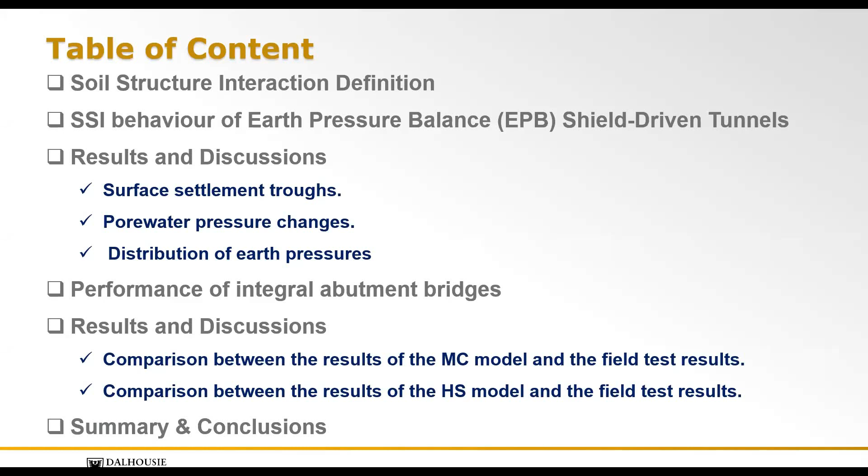Okay, so we're going to finish with a summary and conclusions.

So, soil structure interaction. What is soil structure interaction? It is a process in which the deformations of the structure will affect the response of the soil, and in turn, the response of the soil will affect the deformation of the structure. So it is important. Let's see what we have.

First, some structural engineers may consider analyzing their structure assuming that we have supports here, basically closing everything, assuming the building is built on rock with no deformation, no soil structure interaction. This will entail no interaction at all. If we have seismicity, an earthquake or whatever, we're going to have a big problem. The performance will be so different.

Then, one step ahead, one step further, will be to represent the soil using springs, to simulate the stiffness of the soil and its effect. So again, we didn't simulate the real soil structure interaction, we just took part of it. We can say it's not halfway, let's say 10% or 20% along the way.

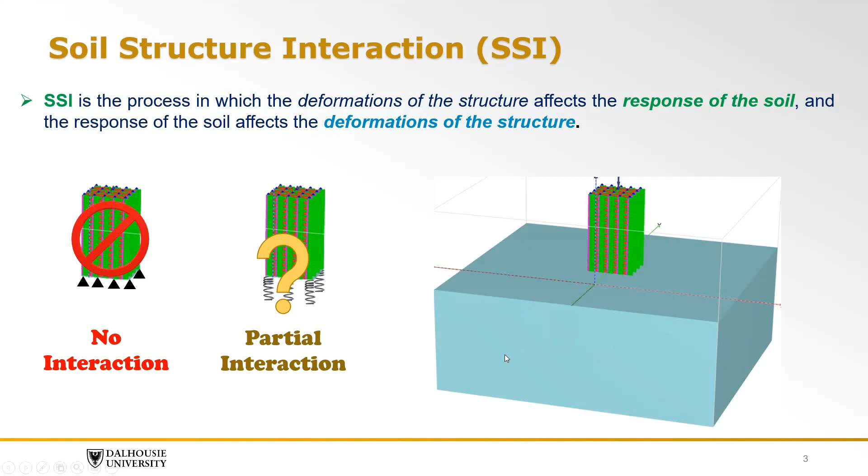Then if we consider the entire thing, the full soil structure interaction, this is the right thing to do. This is actually going to give you the real performance, or the real prediction of the performance of your structure. So here you're going to consider the full interaction.

So this is our journey through soil structure interaction. We can totally ignore it - wrong results, bad prediction, not good. Or we can consider it partially, but again, partially means some part of it, so it's not good, but let's say 10, 15, 20% along the way. And of course, if we want to consider everything, we need to consider the full soil structure interaction.

However, every one of these approaches comes with its cost. So the numerical cost, the numerical effort, and the expertise of the numerical modeler is very important here when we consider the full soil structure interaction.

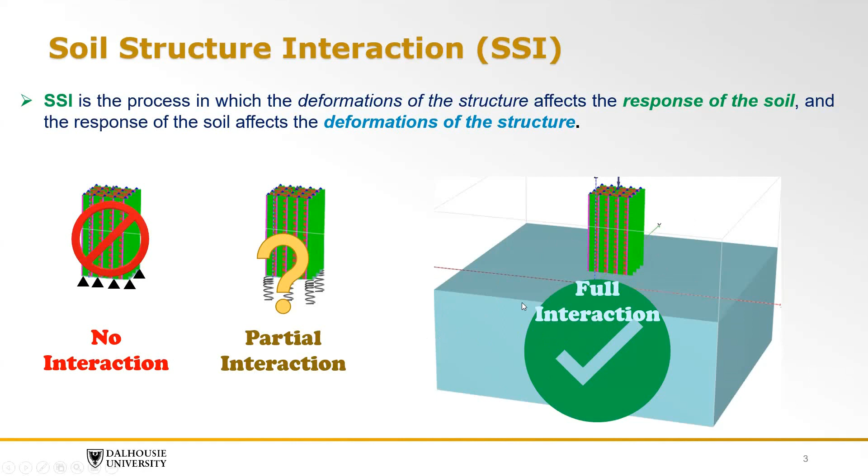So let's continue. In this lecture today, we will explore the effect of soil structure interaction and the predicted performance of two special geotechnical problems. I chose two different problems for this lecture to show you the power of soil structure interaction.

The first problem involves investigating the effect of soil structure interaction and the employed constitutive material model on the prediction of the behavior of earth pressure balance shield-driven tunnels, utilizing a real case study of Metro Line 2 in Shanghai, China.

In the second problem, we're going to do basically the same thing - investigate the performance of integral abutment bridges. However, we're going to use a case study from New Brunswick, Canada.

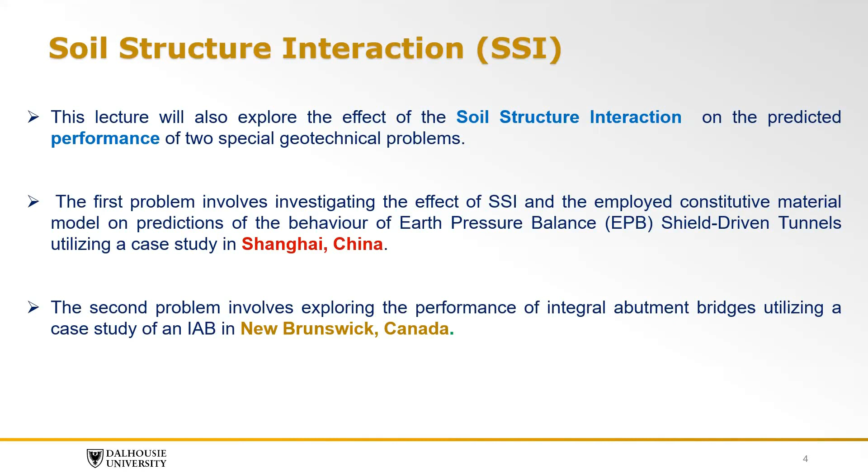So let's start with the tunneling problem first. This is the map of Shanghai. This is Line 1, and the green one here is Line 2, which we considered in our analysis.

So after they excavated or drove Line 1, they went into Line 2. If we expand this area to magnify it, we're going to see this is Line 2 here, and these are the boreholes available along it.

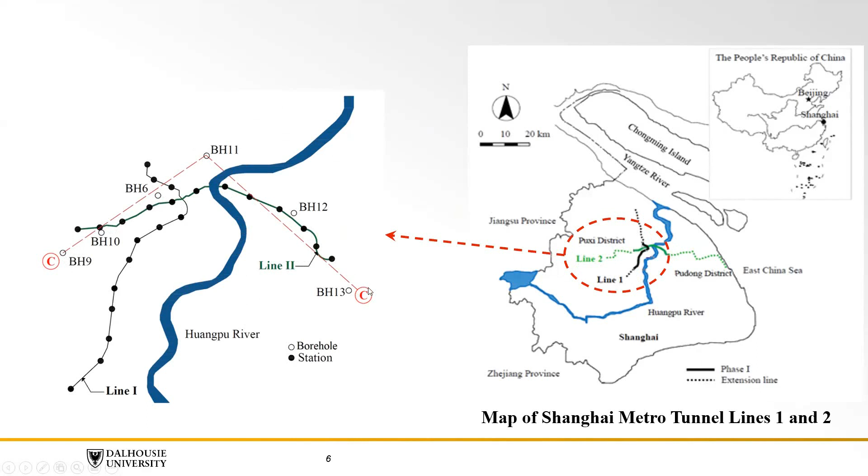As we see, we have so many soil layers here - mostly soft clays, soft soils, silty clays. So in general, soft soils.

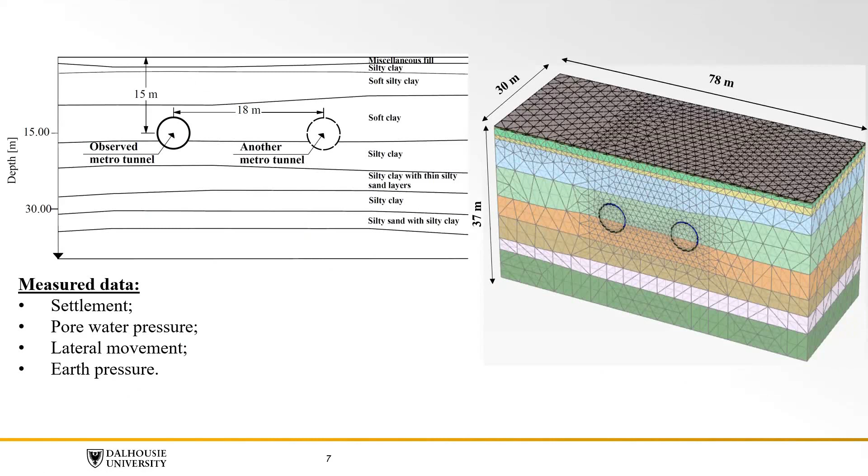And the tunnel itself was composed of two tunnels - tunnel 1 and tunnel 2. What we have in hand is the settlement readings, or monitoring program results for settlement, pore water pressures, lateral movement, and earth pressures. That's what we have, as we're going to see later on.

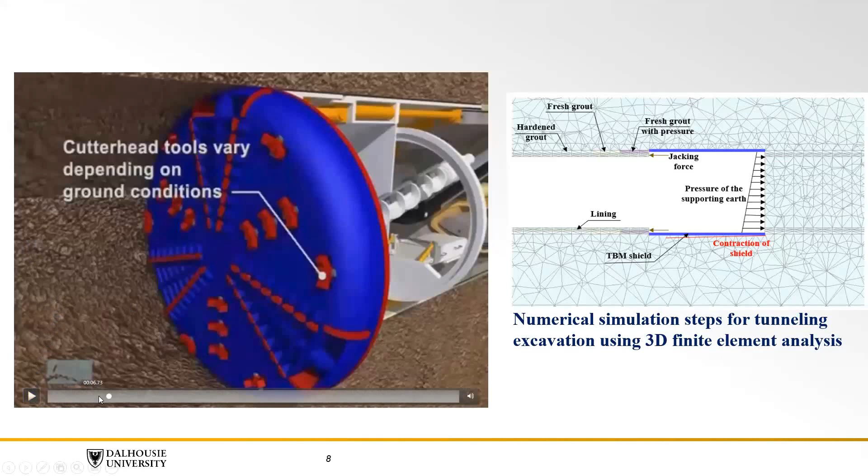So let's refresh our minds on what earth pressure balance tunneling involves. If we look into here, this is the tunneling machine - it has a kind of conical shape a little bit, and we have the face pressure here.

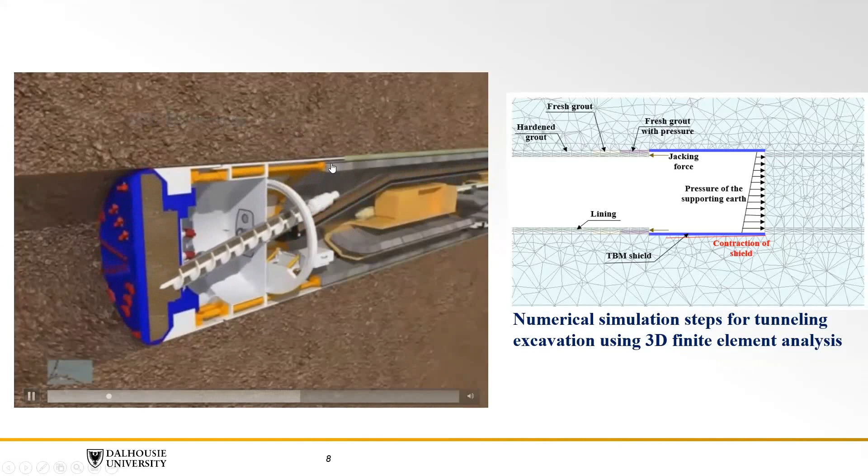As it excavates, the residual products of excavation are conveyed out through the conveyor. As it excavates, creates the area, and moves in, we're going to create a void space to install the new segmental lining. Then after we put each segment along the ring, we start injecting grout.

So if we look from this side, we have face pressure, then our lining, and we have grout in the tail here. This grout is not hardened immediately - we have fresh grout, and this fresh grout will harden over time as we proceed. So this is the general process.

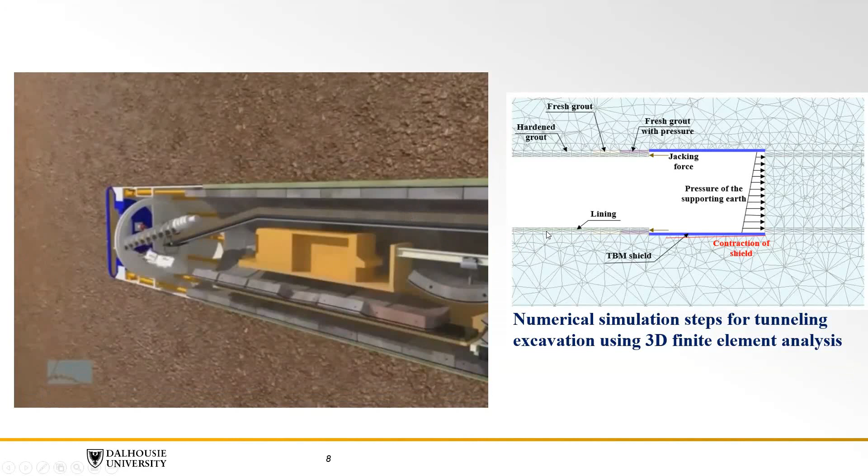So in order to start the model, we use the concrete model available in Plaxis.

This concrete model was just new. This work here that I'm presenting, we did it, I think, 3 years ago. So we have first to validate the model, make sure that the model works fine.

We validated the results through tests done by Wee et al. for plain concrete in 1996, and another test by Mansour et al. in 1999. Here we have stress versus strain, and the gold dots represent the test results, whereas the continuous green line represents the predictions of Plaxis 3D. It is beautiful, we can say that it matches beautifully.

We were able to capture the performance of the concrete, even post-cracking, which is very important in this region here. So it is amazing. I actually had to double check it a couple of times to make sure that everything is fine.

This was done by my student, who right now is Dr. Anna Maria Zaki. This paper is published in Transportation Geotechnics. I can give you the link at the end for the paper to enjoy reading it.

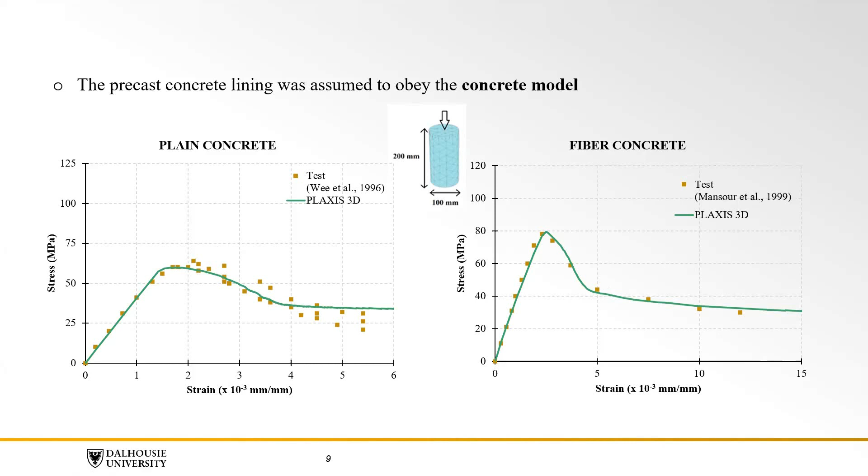Also, what we are showing here is the 3D mesh of the problem. We have several different layers, as we said before, and we modeled 42 meters of this tunnel in the third direction.

We use the hardening soil model. We wanted to see which soil model would give us the best prediction. So we considered the hardening soil model, the hardening soil model with small strain stiffness, the modified cam clay model, and the soft soil model, all in Plaxis.

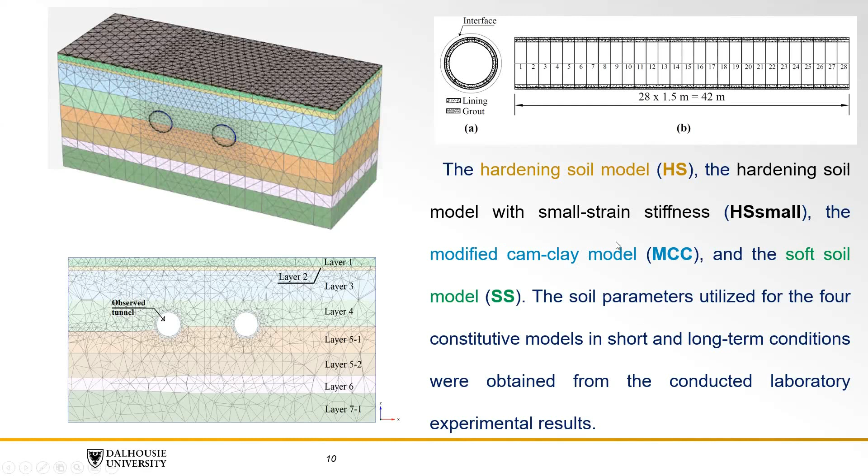The soil parameters utilized for the 4 constitutive models in short and long-term conditions were obtained from the conducted laboratory experimental results. Accordingly, we obtained all of the required parameters for each of the models. Here I'm just summarizing what this entails in 3D.

As we said, we have face pressure here that will be applied, and we have the weight of the conical shape earth pressure machine. This is the shield of the machine. As it progresses stepwise, as it installs the new liner ring, the grouting will continue - we start with fresh grout, and then as it proceeds, this grout will be hardened, so it will be assigned the hardened grout properties. Then the process will just repeat until we finish it.

Just for your information, each run took us, on a very powerful server that we have in our group, 7 days continuous. Why? Because we are modeling everything - we are modeling the true construction procedure.

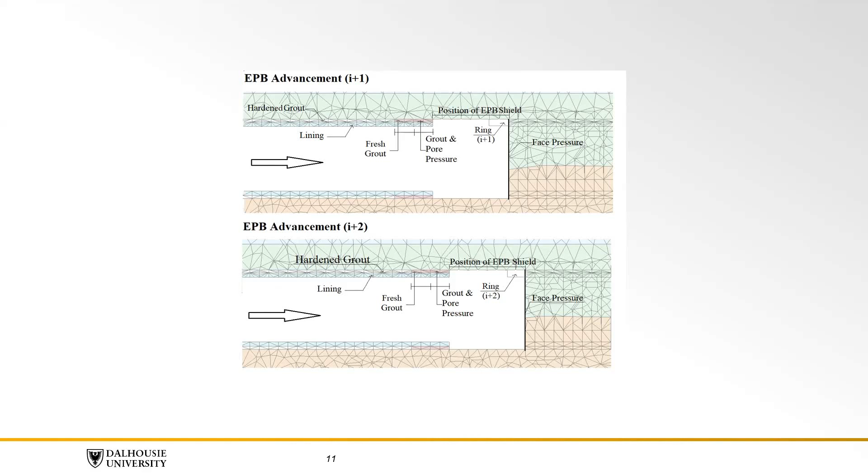We also modeled the connections, so we modeled the tunnel segments and the connections with the bolts. So everything is being modeled here in detail.

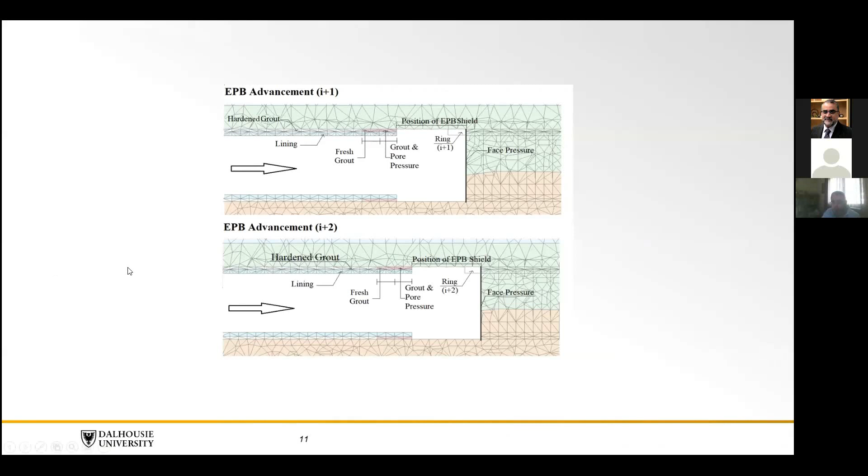Let's see what are the monitoring results and their comparison to the predictions of our model. We have the results of the surface trough after 1 month and after 3 months from the general heading time. The experimental results are shown here as orange squares - this is after 1 month and this is after 3 months.

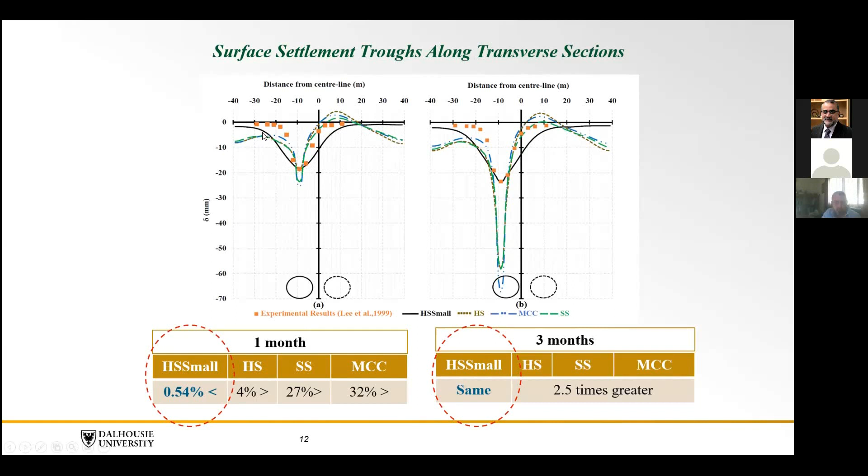The black continuous line represents the hardening soil model with small strain. The brown one represents the predictions of the hardening soil model, whereas the blue one represents the modified cam clay, and the green represents the soft soil model.

As we can see here, the best one of them that mimicked the performance of the settlement trough is the hardening soil model with small strain. After 1 month, the predictions were within less than 0.5%, and 3 months the same. However, for the hardening soil model it was 4% at the maximum, for the soft soil it was 27%, and for the modified cam clay it was way higher, around 32%.

Actually, in the 3 months, things get much worse for the other ones. So from here, we can say that the hardening soil model with small strain outperformed the rest - it was the best.

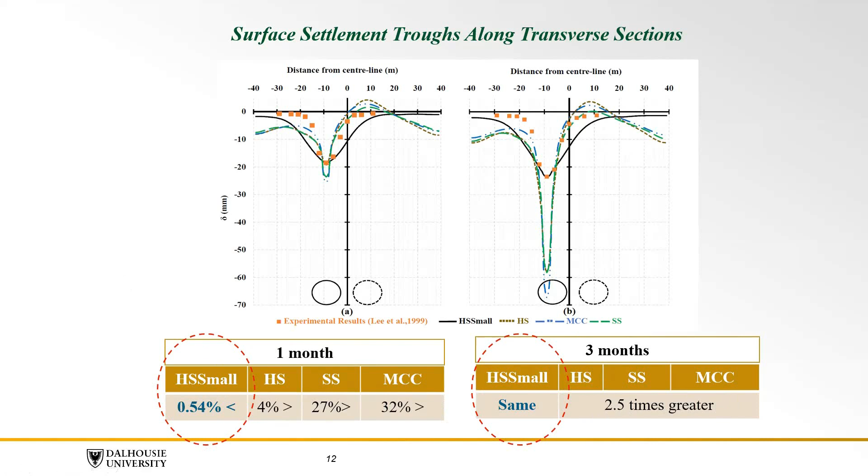Let's move to the pore pressure. This tunnel here was fitted with different piezometers at different depths to monitor the progress of the pore pressure with time. Here we have the results of 200 days, or 180 days, of monitoring - basically 6 months of monitoring from construction to the end.

Here we have the predictions of piezometer 1, 2, 3, 4, and 5, in different locations over the tunnel. Again, we can see that the performance, especially near the tunnel, of the hardening soil model with small strain is the best.

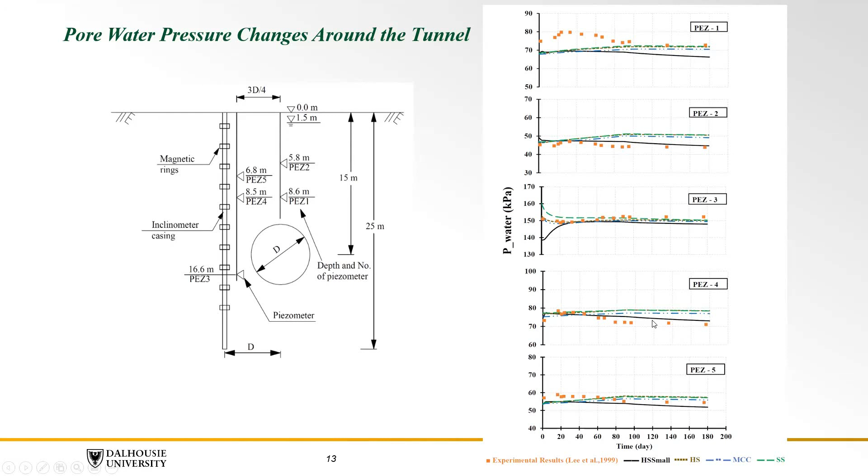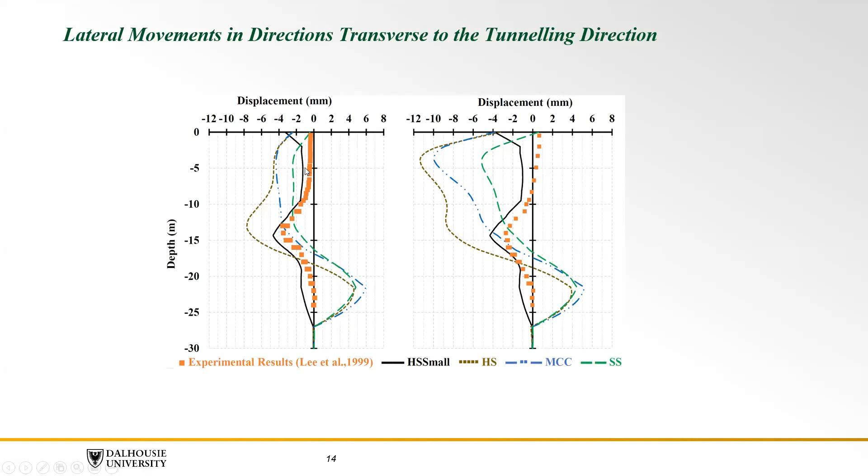Same thing here for the lateral movement of the tunnel in the transverse direction. The orange squares represent the field case study, whereas the black line represents the hardening soil model with small strain, and we see that it was the only one able to mimic the lateral movement. By the way, here we are talking about 2 or 3 millimeters, so it's very, very precise - the difference here is less than 1 millimeter or so. The prediction is great.

Also, this liner was instrumented with different pressure gauges, pressure cells over the tunnel, and here are the predictions during construction of the different cells. And we can see a perfect match, excellent match of the pressure that was obtained by the hardening soil model with small strain.

This showed us the importance of the soil structure interaction. We were able to mimic the behavior exactly for this very complicated tunneling problem. This is tunneling in very soft soil, so everybody who works in tunnels knows this is a very challenging problem. However, the power of soil structure interaction and the use of appropriate soil model was able to help us predict the results very, very nicely.

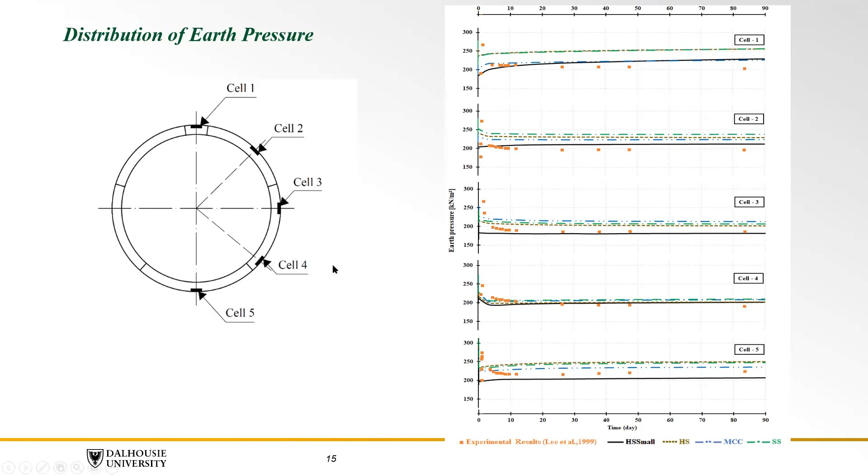So let's move to the second part of this lecture, which is considering the Industrial Park Route 7 Underpass Integral Abutment Bridge case study here in New Brunswick.

So let's introduce what is an integral abutment bridge, because maybe some engineers listening to us right now don't know exactly what is the behavior of it. So they are monolithic structures in which portions of the superstructure and the substructure move together into and away from the backfill to accommodate translation and rotations, with no expansion joint and bearings.

Everybody who works in the bridge industry knows that bridge bearings and connections are the worst - they need lots of maintenance. It's very costly, especially in countries in the north, like United States, Canada, Northern Europe, whatever. We have huge fluctuation in temperature, and accordingly we use de-icing salts and stuff like this. So we need frequent maintenance, and this is huge cost.

Accordingly, they moved more or less to integral abutment bridges, where the structure and the abutment of the bridge are poured together, working as one structure, eliminating the need for any joints or bearings.

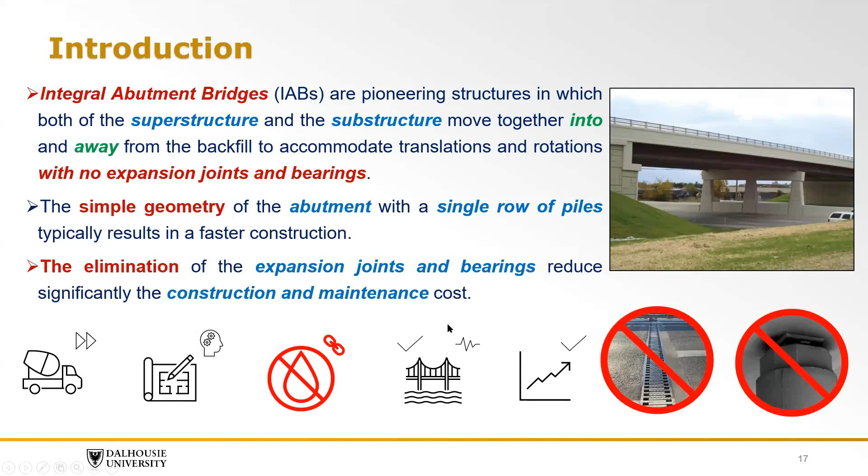So it's very, very useful to eliminate the expansion joints and the bearings, which will significantly reduce the construction and maintenance costs. In general, integral abutment bridges are characterized by their complex soil structure interaction of the abutment wall and the foundation, as they are subjected to cyclic loading.

So let's say in the winter, the concrete will shrink, right? So the structure will move away from the soil, and this will constitute more or less an active earth pressure. However, during the summertime, the concrete will expand, and accordingly you push on the backfill soil and it will be in its passive mode.

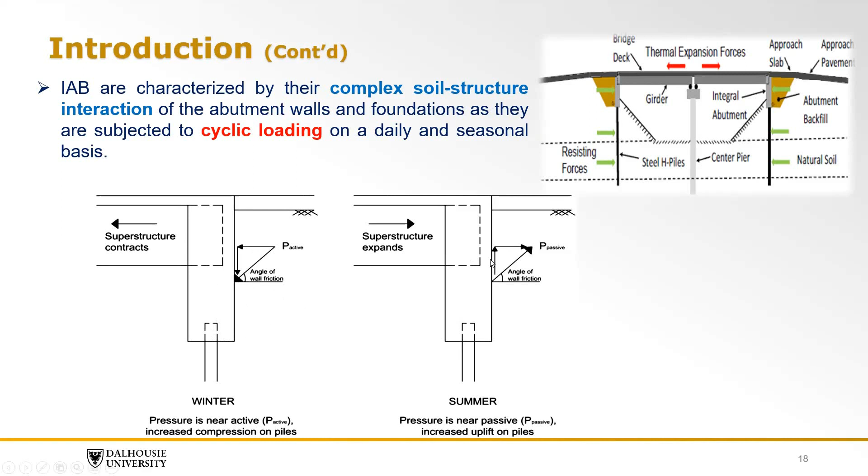The objective of this part of the lecture will be to understand the effect of the thermal movement of the bridge on the soil structure interaction. We're going to utilize a two-dimensional finite element analysis. We will also explore the effect of the employed soil model to see its effect on the prediction of the earth pressure within the soil mass, as well as the earth pressure acting against the abutment, which undergoes cyclic loading.

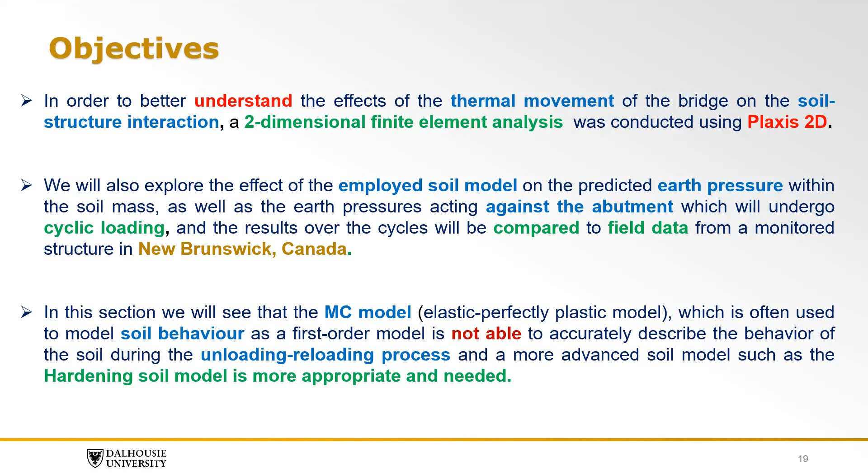And also in this section, we're going to demonstrate that the simple Mohr-Coulomb model, or the elastic perfectly plastic soil model, that's being used frequently by several engineers to model such problems, is not good and will not accurately describe the behavior. It will not be able to do this, and we need more advanced soil models like the hardening soil model to be used.

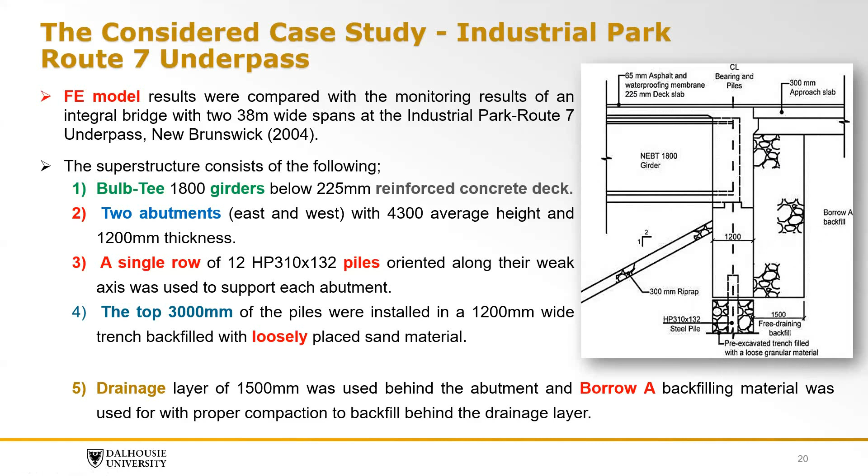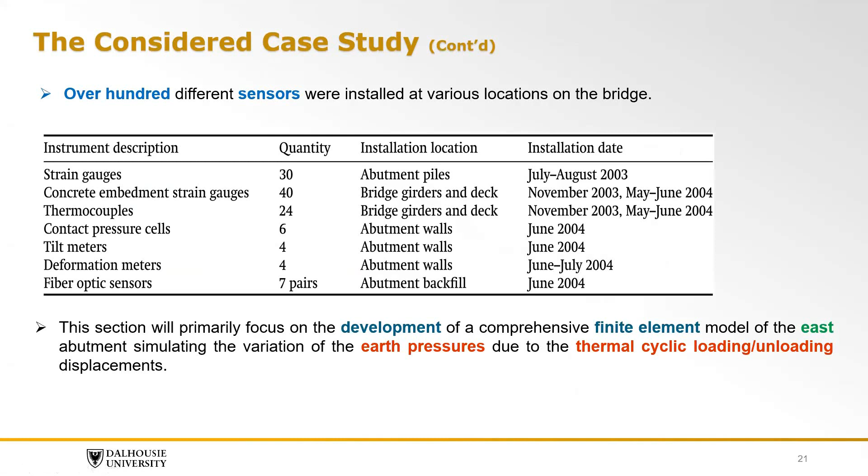So this abutment was heavily instrumented with strain gauges, thermocouples, contact pressure cells, tilt meters, deformation meters, you name it. This will help us develop a comprehensive model that we can validate using several things, not only one. So basically here, this is the wall, the retaining wall.

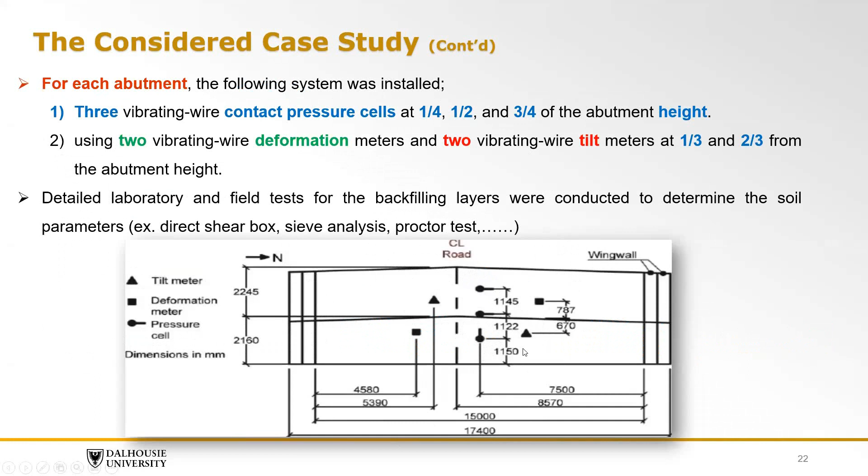So we have the earth pressure at 3 levels, and we have the tilt meters here at 2 points. This is the monitoring results that we have.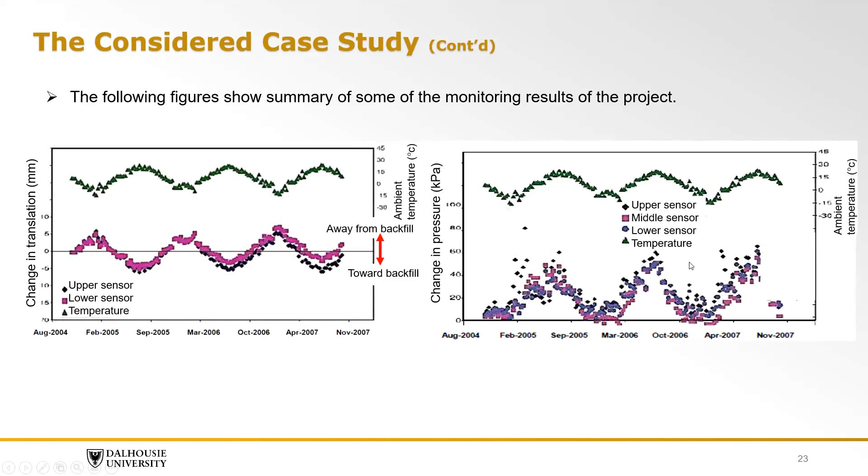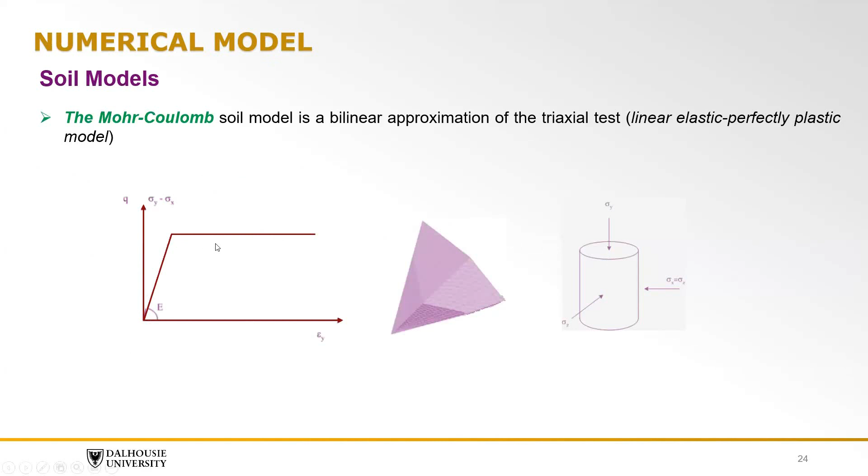So we have two soil models here that we used. The first one is the elastic perfectly plastic soil model. We all know this model - you just need your elastic modulus E, and accordingly your phi and C, and that's it. So it is perfectly plastic after.

The second model, the hardening soil model, is suitable for this kind of loading especially because it has three different stiffnesses. One stiffness, E50, represents the triaxial loading stiffness, which we use to determine the magnitude of both the elastic and plastic strains.

We have E-oedometer, the oedometer loading stiffness, which accounts for the plastic strains due to primary compression. And finally, we have E unloading-reloading, which in conjunction with the Poisson's ratio will determine the ground behavior under unloading-reloading conditions.

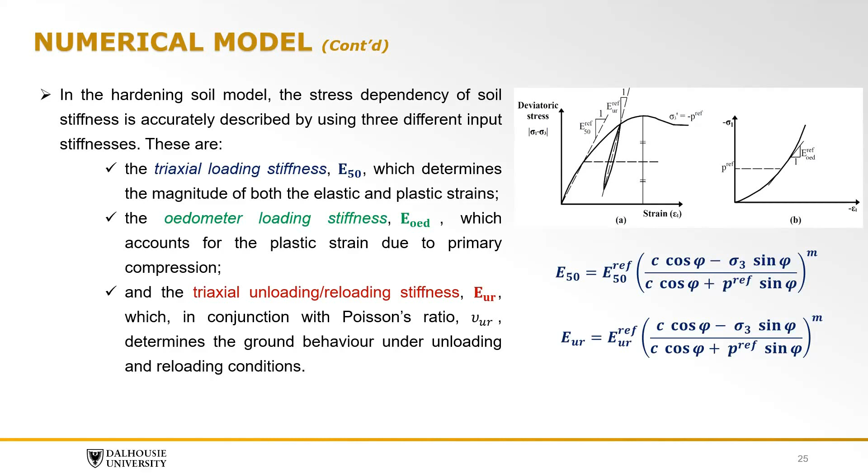So we developed two Plaxis models. We applied to those Plaxis models the cyclic thermal displacements, and we monitored the earth pressures.

We have one model that was utilized using the hardening soil model, the one that we believe will predict their behavior better. The second model used the Mohr-Coulomb soil model, the elastic perfectly plastic soil model, which we want to demonstrate is not suitable.

So these models follow the same geometry, layout, and construction procedure of the full-scale abutment, and the results were compared with the field-measured earth pressures.

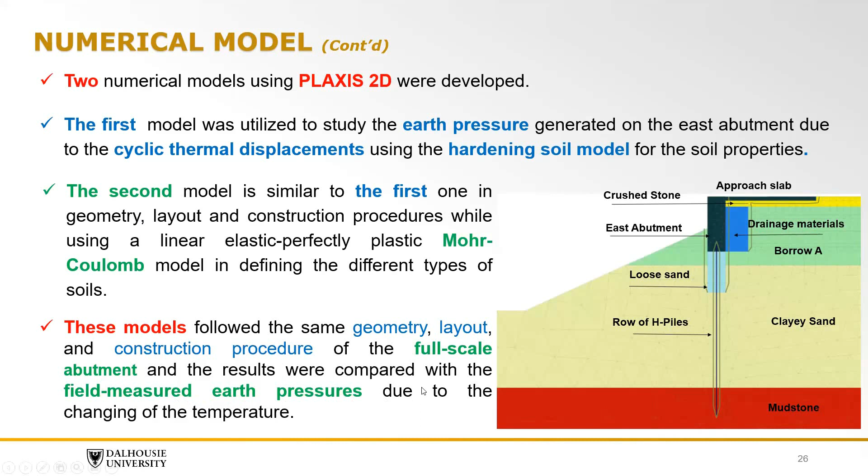So then we simulated the excavation. Then we placed the pile platform. Then we put our pile in sand. Then we continue with the whole construction sequence, until at the end we have our full abutment with the loads coming from the main structure.

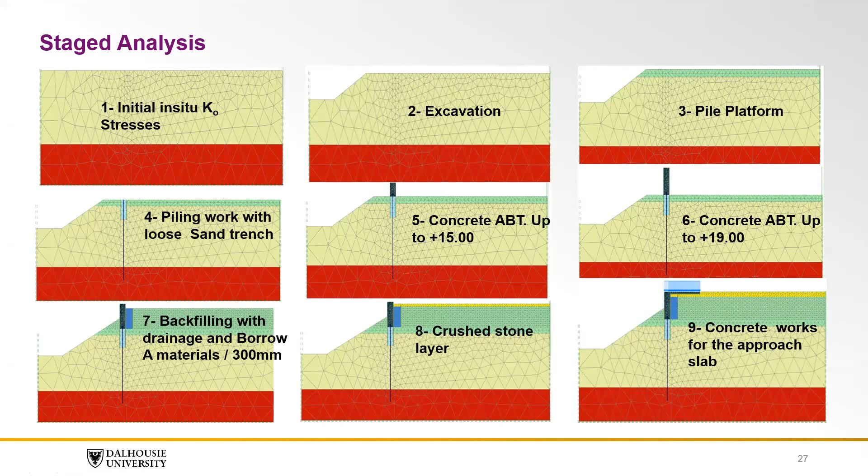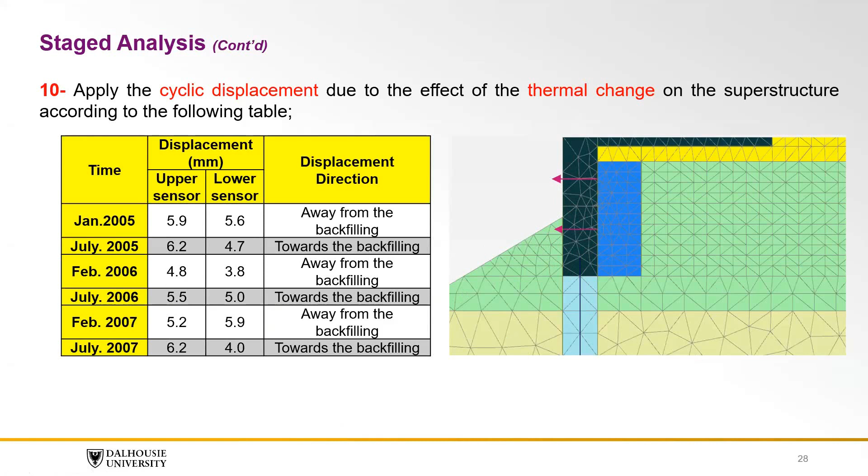So in this problem, this is the applied displacement - a superimposed displacement that represents the monitored cyclic displacements. And then we were going to read the earth pressures in the back of the wall and compare it to what we have.

So here we are showing the results of the second model, which is the Mohr-Coulomb model. Here we have the predictions versus the field measurements, with predictions from 3 years - in green here we present the first year.

In purple, we present the field results of the second year, and in red the field results of the third year. The Plaxis results are in dotted lines, presented along the height of the abutment. Here we present the seasonal changes of the soil pressure, the difference or movement of the soil pressure, at three locations where we measured the pressure.

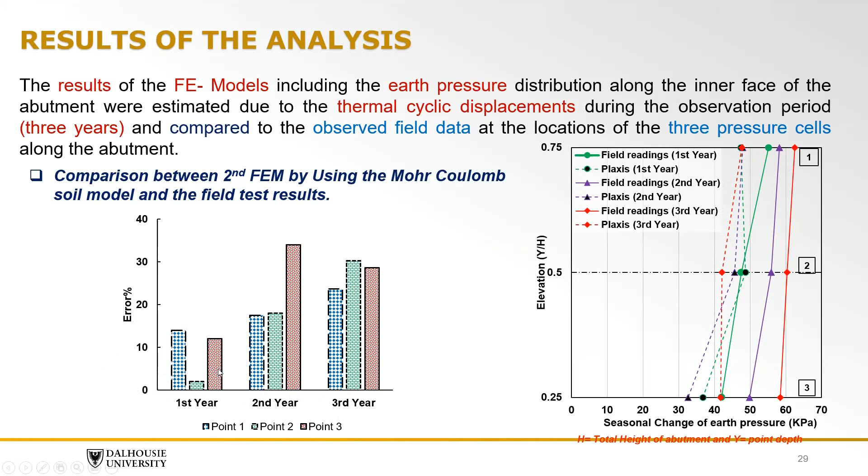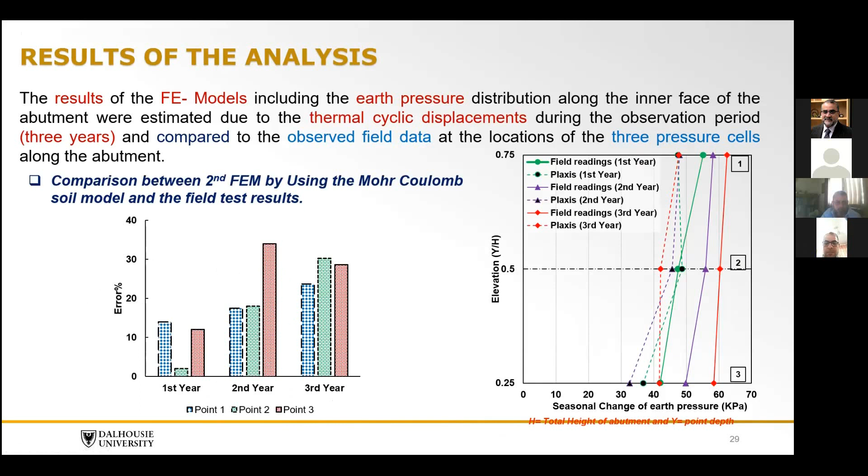Those three are the soil pressures in reality, and this was the soil pressure obtained using the Mohr-Coulomb model. If we consider the error in predictions for the first, second, and third year at the three locations, we had an estimated error of about 33 or 34%. Huge, definitely not acceptable. Let's see when we consider a better prediction model.

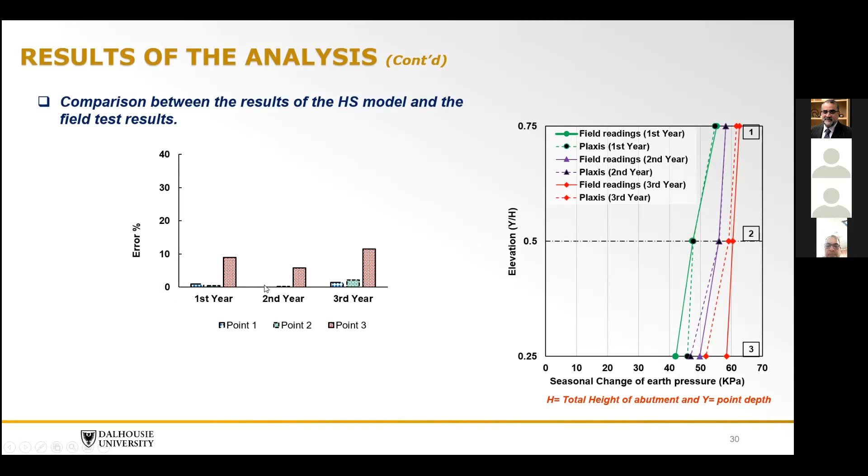As we see here, the predictions of Plaxis and the field results are almost identical. The only difference is 3-4 kilopascal, which is basically nothing. The error is less than 10%, and this is at the very lower point. At the other points, the error is almost matching - there is almost no error, we're talking about 1%, 2%. So this is a perfect prediction.

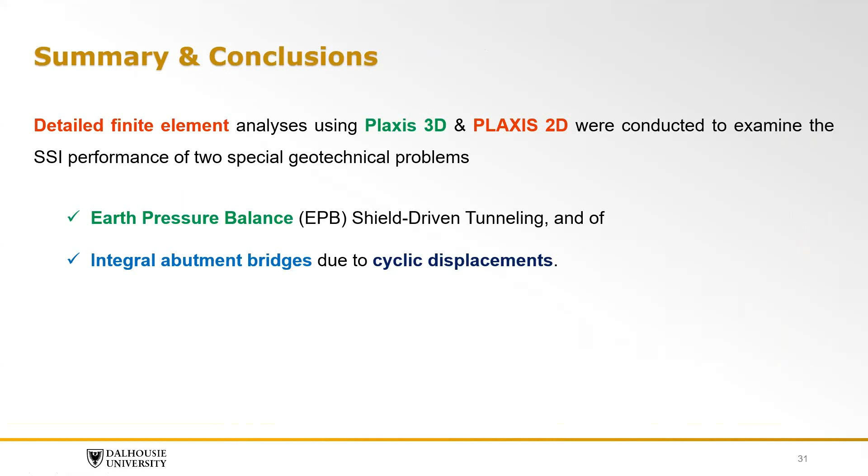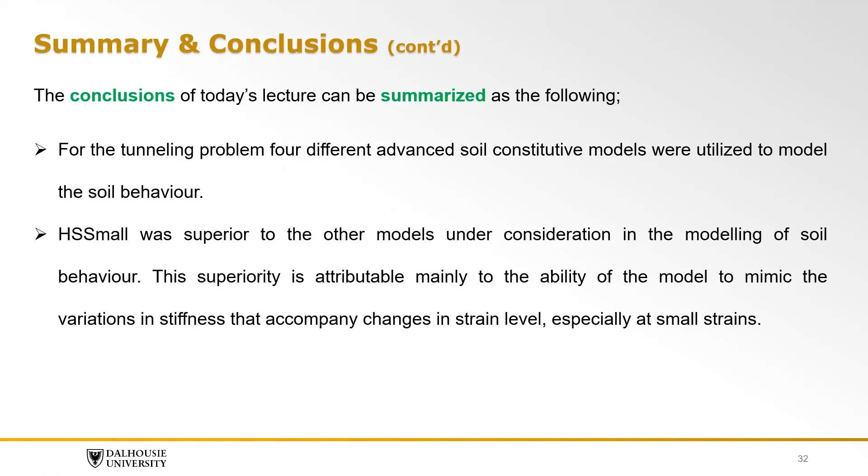So to summarize and conclude, we presented a detailed finite element analysis using Plaxis 3D and 2D to examine the soil-structure interaction performance of two special geotechnical problems: the tunneling problem and the integral abutment bridges. For the tunneling problem, we considered 4 different advanced soil constitutive models. The hardening soil model small strain was superior to the other models, attributed mainly to its ability to mimic the variation in stiffness that accompanies changes in strain level, especially at small strain levels, which is very important in tunneling problems.

However, for the integral abutment bridge problem, we showed that the simple elastic-perfectly plastic Mohr-Coulomb model frequently used by engineers is not capable of simulating the soil behavior during cyclic loading and unloading, and that the hardening soil model was a better soil model to use. The maximum error of the hardening soil model was much lower than 12%, whereas the error for the Mohr-Coulomb soil model was 34%, one-third.

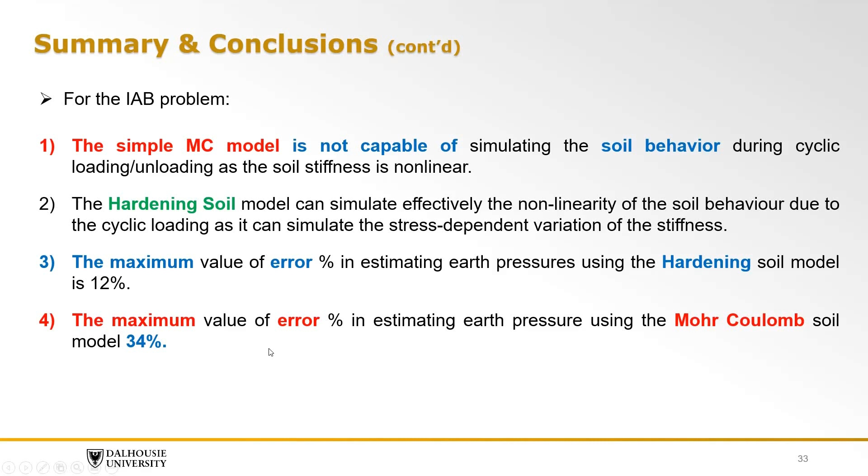So definitely it's not acceptable. Thank you so much, it was my pleasure today to be among you and to present.